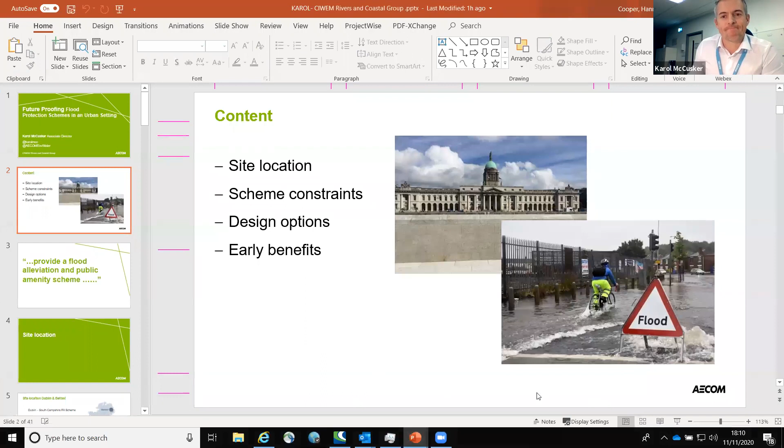Hey folks, first of all, thanks for inviting me to give this talk this evening. I hope you find it all interesting. I'm slightly envious of you all because I appreciate at least 90 odd participants are sitting at home probably having beer or wine whilst watching this, while the rest of us are stuck in the offices. But I'll not hold that against you.

So I'm going to talk just quickly about future-proofing flood protections in an urban setting, and this is becoming more and more topical as we move on and as our designs have to take account of the urban setting more so than the rural settings.

I'm going to talk roughly about the site locations, and for this I'm going to use two example sites, East Belfast and South Campshire. I want to talk a bit about the constraints that we came across in the scheme, and you'll all come across these sooner or later when you design these. The design options that I've learned and developed over the years in my career, and the early benefits you can expect going forward.

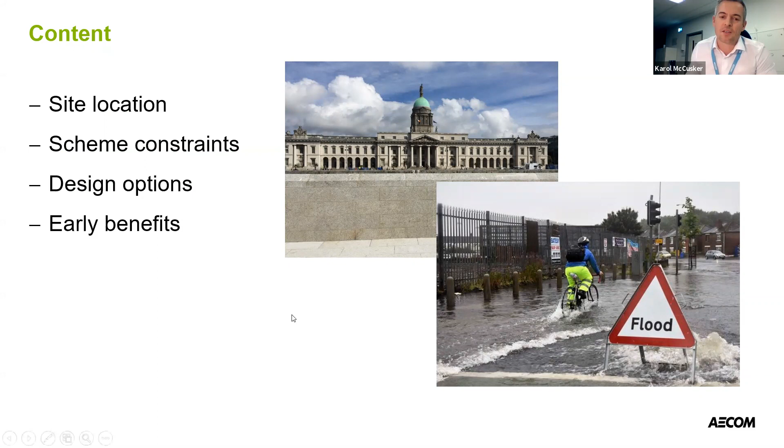The first important thing is that whenever you sit down to design a flood alleviation scheme, it's important to remember flood alleviation schemes are multi-tools. They can be used more so for public amenity as opposed to just for flood alleviation. There was a time in the past when we were concentrating purely on flood alleviation, but as we look to the future, I think as engineers we've all accepted that we have to develop a flood alleviation scheme that does more than just protect against flooding.

So I'll cover the site locations. As alluded to, the two sites we're going to talk about: one is in Dublin in South Campshire, actually on one of the main roads in Dublin on the quayside. And the other one's in East Belfast. We are going through heavily urbanised areas.

So the need for the scheme: in Dublin, the South Campshire is a stretch of land approximately a kilometre in length that goes along the south bank of the River Liffey. Dublin falls north to south, so this is not a major issue for the northern bank, but for the south bank of the River Liffey, once water gets up to a certain point, it flows inwards into the inner city. The rough floodplain for the flood event we were designing for was roughly 32 hectares of inner city Dublin being flooded. Bearing in mind that Dublin is quite an old city with basement houses, major roads and everything, this was a major event that could occur.

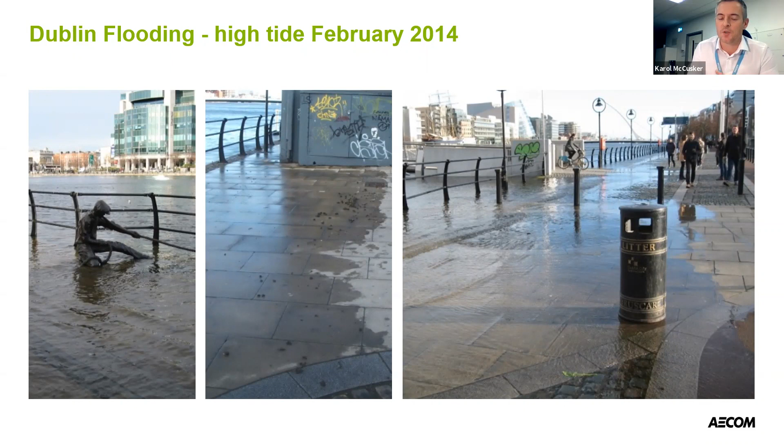So both schemes were definitely needed to help from a social, economic and environmental aspect, because once you have flood water that enters an urban environment and then has to return, the pollutants and problems that coincide with that have to be prevented. So now it would be relatively straightforward if it wasn't for the site constraints, and you'll recognize a lot of these constraints as you go through some of your own designs and careers.

The first one was in Dublin. As I said, it was about a kilometre length along the River Liffey. The River Liffey hosts the Dublin Tall Ships biannually sometimes, which has an economic benefit of around 30 to 50 million euro coming into the city, and that in itself is a massive economical benefit. So whatever you do along this 1 kilometre, you had to take account that these ships would have to pull alongside and still use this area.

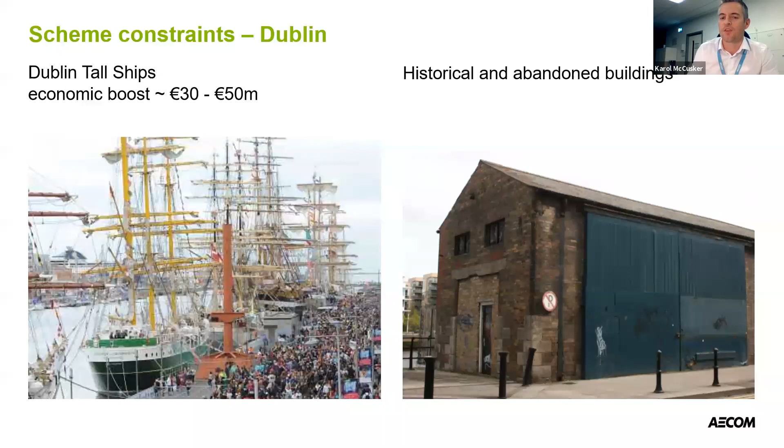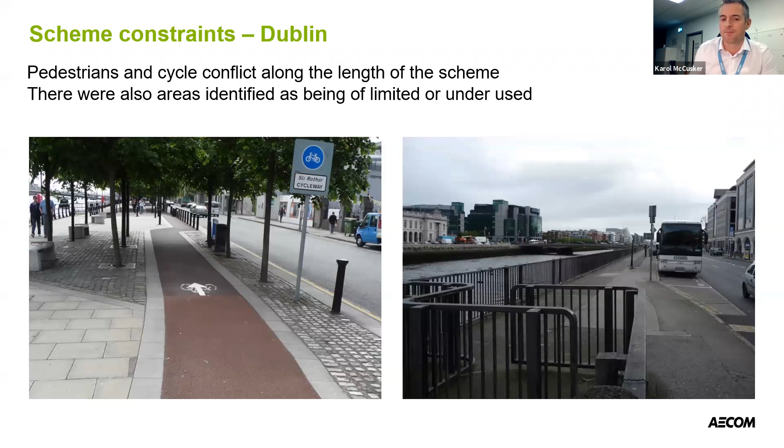On the right-hand side, you can see how some of the area was underutilized. We had a large parking bay for buses that was occasionally used, and we had a horrible grey area that was used for nothing more than people on occasion walking past, but not used as an open space, for example. So we had to consider all these things.

In East Belfast, then, we had the typical thing that you probably see as river engineers doing inspections: that horrible grey water, which is really a symptom of being either a channelized river or a river that doesn't get enough air in the water. It's not very good for either the environment or even for people to look at.

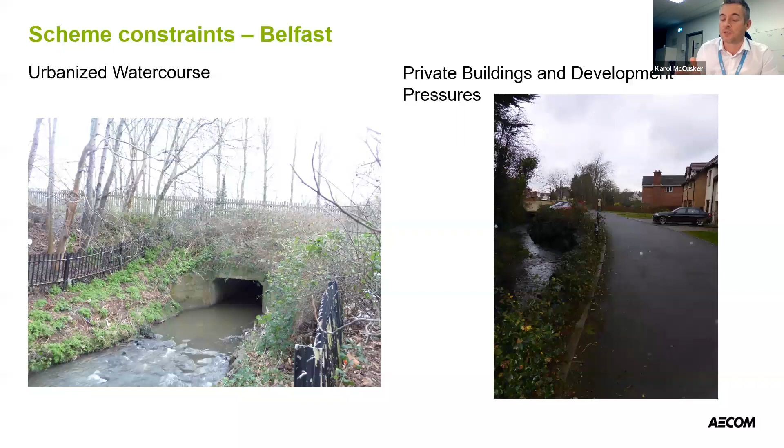So those are the problems. What I'm going to show now is some of the tips that we've come across in innovative design to try and compensate and address those issues.

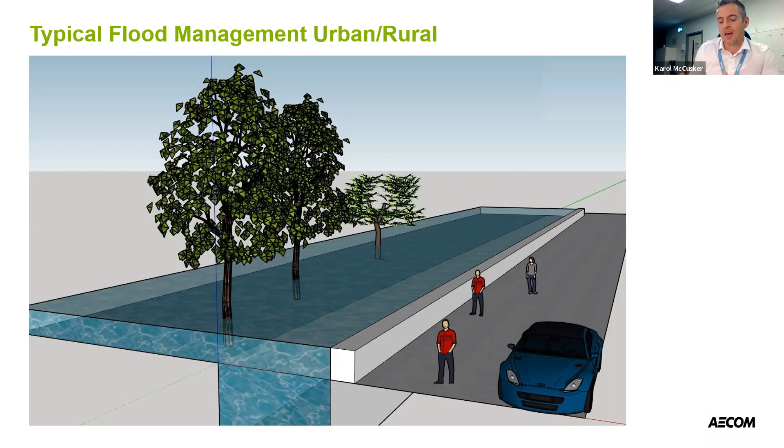I suppose we probably all know that traditionally flood management of urban and rural areas just took two general options. The first one was on the urban side, you built your flood wall as close as you could to the top of the bank. And in the rural atmosphere, you flooded as much of the green open space as you possibly could to park the flood water.

Moving forward, you generally then get into the solid urban solution where the options are basically you build a wall either side of the top of the bank. Then you have to worry about freeboard and probably some climate change, so you just build the wall higher. Now that has two effects: one, it changes the velocities of the river itself, the river becomes very channelized, and then the ecosystems within that river suffer dramatically for this.

Plus the people then get cut off from the river. And generally once people get cut off from a river, they generally forget about it, or in worst case scenarios, it becomes a very convenient way of dumping materials or just getting stuff thrown over the wall and forgetting about it.

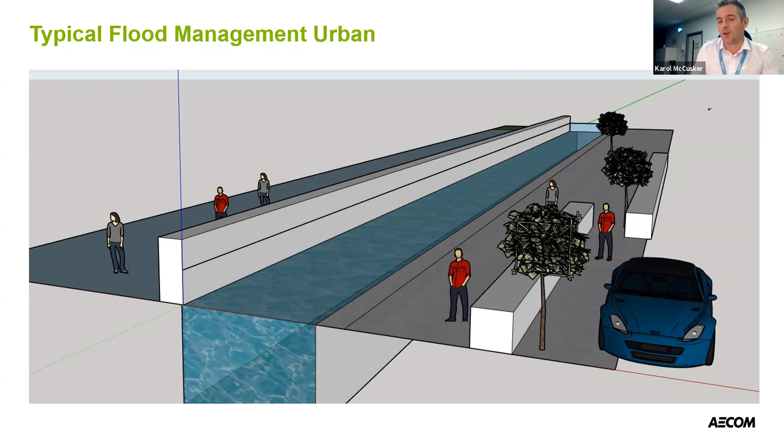So for this option moving forward for the South Campshire, what we looked at doing was pulling the flood wall back as far as we possibly could towards the buildings. Bearing in mind we're dealing with a different type of flood mechanism here - a coastal flood that would come in over a certain amount of time, so we'd have notice of it and could afford to deploy floodgates. So we played around stepping the flood wall back into the city as far as we could, knowing we had concrete areas there that could act in the same way as a rural floodplain storage.

Then we looked at some of the open space areas. This first option I showed was a large concrete area with a handrail. Looking behind in this photograph, the typical Liffey walls are built just on top of the keystones with a bishop-shaped hat stone on top. We wanted to replicate that but make this area more open. To the right-hand side you have office blocks with no green space, no open space, and people weren't congregating - they just went to their office, had lunch at their desk, and left. This point actually faced Custom House, one of the most iconic buildings in Dublin, and generally tourists just got off the bus, stood on the concrete, took a photograph, got back on the bus and moved away. There was no real atmosphere.

So we designed a flood wall set in a Z shape. The reason is purely that it can rest on top of the historical stone without having to bond to the stone itself, protecting the historical atmosphere. We tried to replicate the same type of wall to the outward eye - it has a reinforced core, but to anyone looking at it, it mirrors the existing historical stones on the far side. We put in some benches and opened up the entire area.

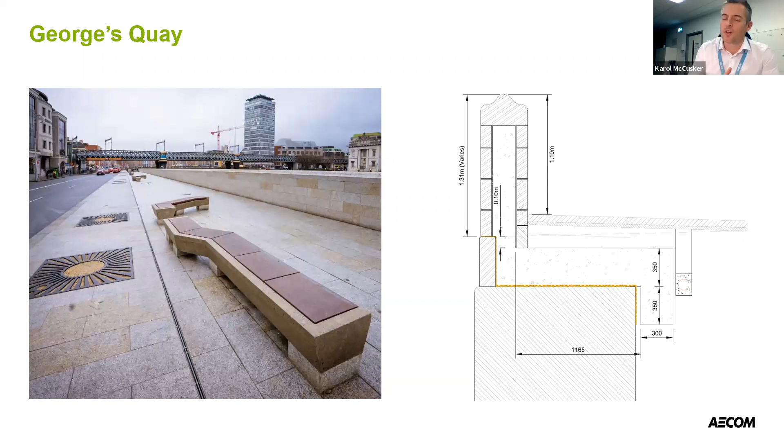We did a quick traffic survey of the parking bay and found it's not overly used - it's almost redundant. So we took it out completely and opened up the space for more public use. With the extra space, we installed a Dublin bike system, one of the most successful bike systems in Europe and heavily used. This became a commuter hub for people who wanted to use bikes or wanted to come across, sit on the bench, and have more of a lunch break outside beside the River Liffey.

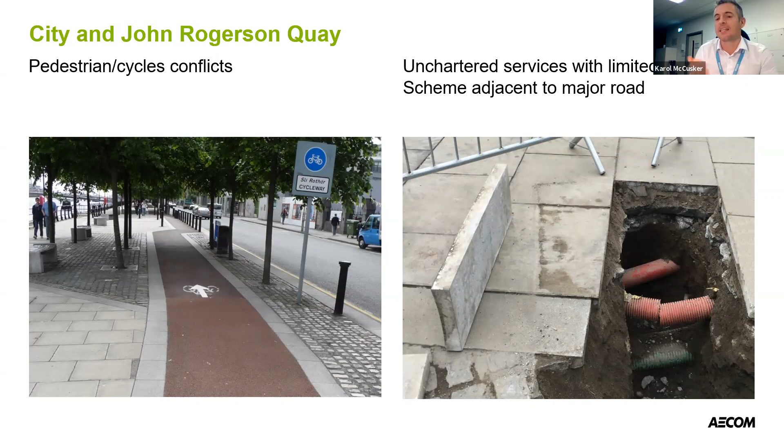Moving further down the scheme, we still had to address the public pedestrian interface - how general commuters would make their way across with bicyclists whizzing past. And then we had the inevitable in urban settings: uncharted services. The one piece of advice I always give people is that any correlation between service records and what actually happens on site is purely coincidental or luck - don't rely on it at all. Services will always be exactly where you don't want them to be, at a very shallow depth. We had to take all this into account in our design.

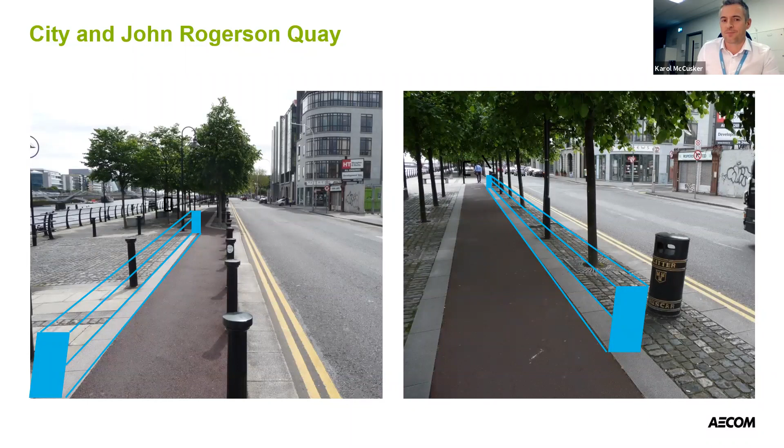As you get towards the quay, this here's looking upstream now along the Liffey. These are the keystones that the boats would use for the gangways to come onto, and they would use them to travel up and down.

So we wanted to put a flood wall somewhere along here that wouldn't impede that, but also would allow people to come over to have a look at the river. We wanted to keep it along the existing handrail as possible. There is a very definite line in the landscape there that we could put our flood wall on without impacting either the keystones or the existing landscape environment behind it.

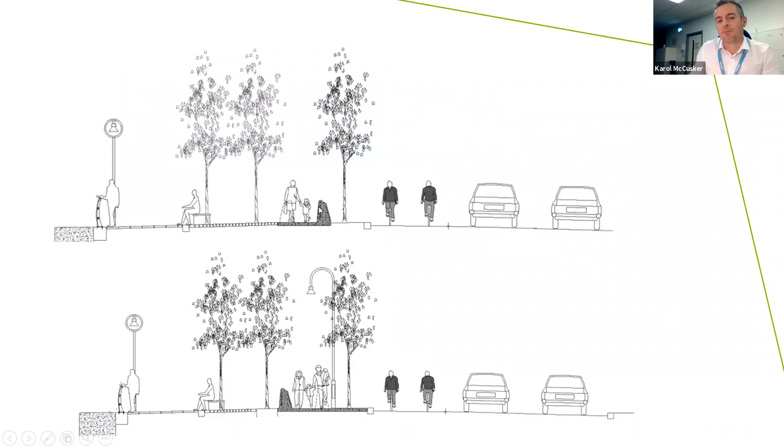Here's a quick cross section of what we're looking at. The top one, going from left to right, you've got your handrail, you've got this massive open area, and then we decided to put the flood wall towards the road. On the road, we looked at rationalizing it to see could we actually fit a two-way cycle path on the road itself to improve the amenity value.

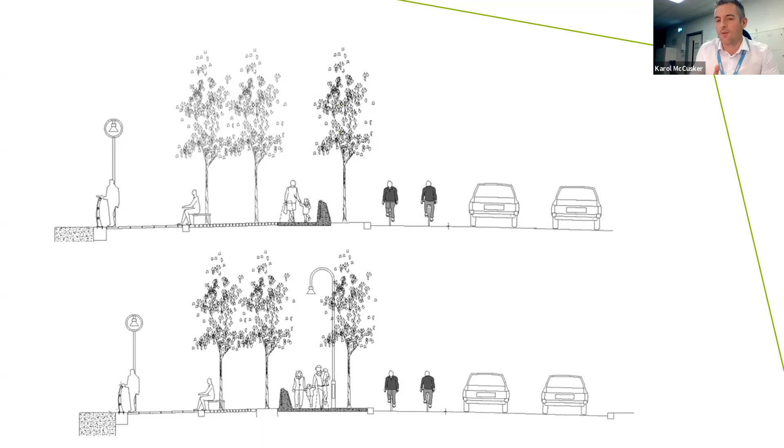In the bottom one, you can see where we've moved the wall inwards again. So people will walk continuously up and down this entire stretch of 1 kilometre without knowing really they're walking through or over a flood defence.

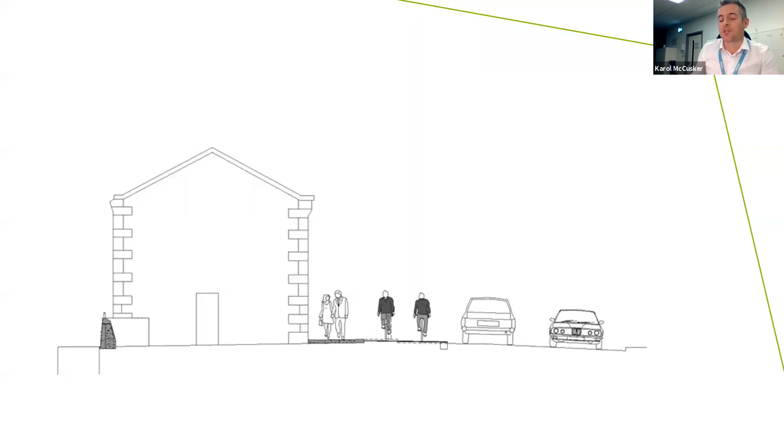Whenever we got to the abandoned buildings, we identified the big problem there was that there was no usable space. These buildings opened out onto a main road. So what we did was we pulled the flood wall as close to the river as possible, giving these properties a door out onto a usable area, in the hope that this could regenerate possibly businesses and the likes of that in the economy.

So the design itself, to overcome the shallow dig we were permitted, what we devised was a strip foundation of reinforced concrete that would go down along the way. Because we were up against a main road and a river, we wanted to have something that could be deployed relatively quickly without having a massive footprint. So that's why we embarked on using precast concrete units that would be 2 meters in length.

The 2 meter units then would sit on top of the concrete strip foundation, and a stainless steel bolt and washer would be used to hold them in position. Then to hide that, they would be cladded with granite on the riverside, and on the city side would have a concrete pattern cast in.

Given that all flood defences are always subject to change and moving forward, we designed it to be as adaptable as possible. So the 2 meter sections with the 2 bolts can become an opening in the future, should we ever need it, by actually just cutting the bolts and removing the unit.

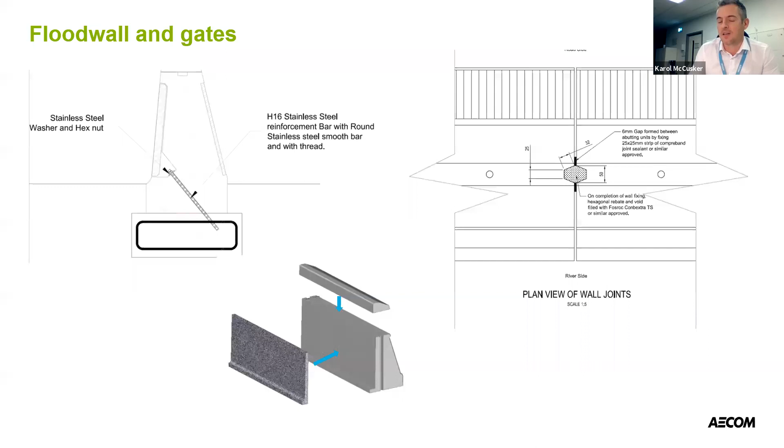On the top of the unit, you'll see in the top left-hand corner, a slight notch. The reason for the notch is that in the future, should we ever need to, we basically remove the coping from the top of the wall and another precast unit slips in at the top of it to provide additional freeboard, almost like a Lego set, so that should future generations ever deem it necessary to raise the flood wall even further, they have that option.

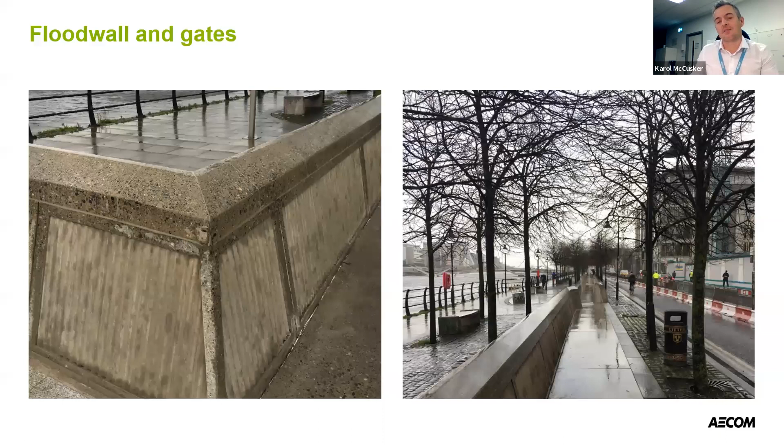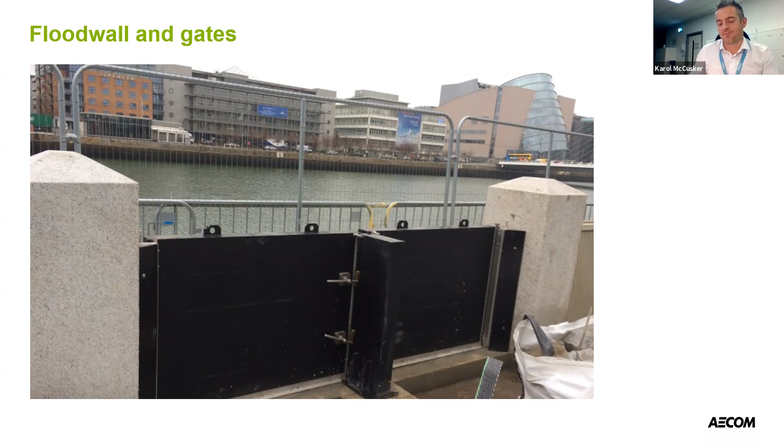Now, I do appreciate what everyone's probably saying, holes in a flood defence wall are never good. So what we did was that where the gates didn't require to be opened all the time, only at festivals, we put these industrial or heavy duty black floodgates in that would generally remain in the closed position. But on the footpaths, what we did was we installed a fold away floodgate. Now these floodgates basically fold into a small shallow compartment held between the 2 flood walls.

Once we get notice of a flood warning coming, we start to close these floodgates in a particular sequence. And the sequence is quite simple: you open the cover, beneath the cover is the floodgate itself, you fold it out and then it folds back on itself. The one thing you do have to be careful of, whenever you design any sort of floodgates, is to be careful about deployment.

Bearing in mind that if you have a major city that has a flood event to address in the future, and as these flood events become more prevalent and unpredictable, we have to build in resilience. So I didn't want floodgates that have to be brought from the other end of the town, through city traffic, or through possibly blocked roads. That's why I opted for these ones that are already on site and only require to be folded out, and can be deployed easily by any member of the civil support, fire brigade, or operations unit. It doesn't require much training. It's relatively easy and they can be deployed quickly.

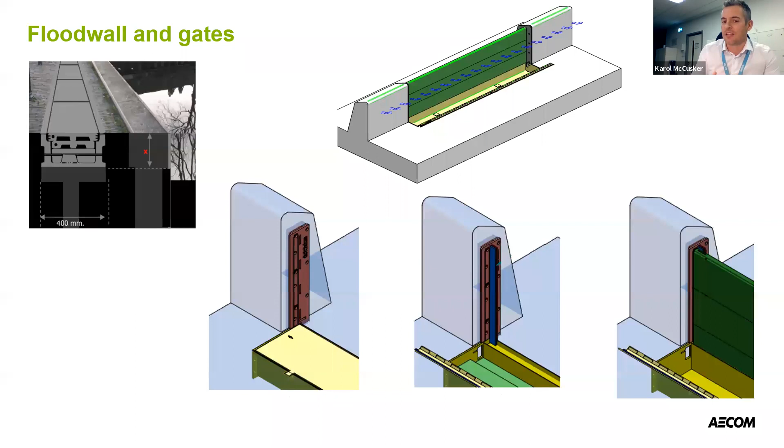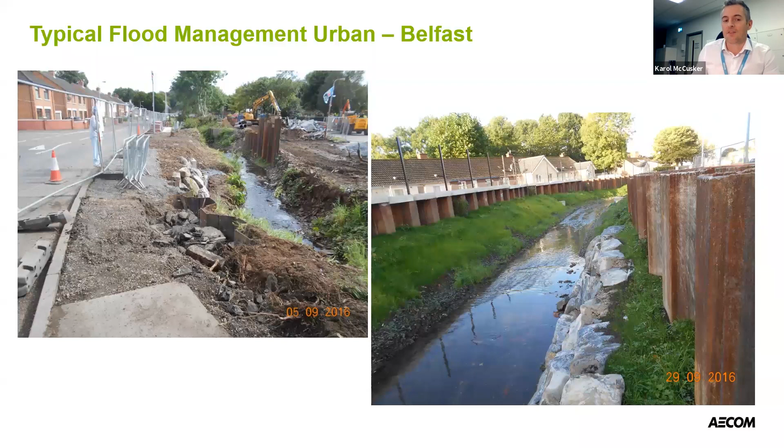On the left-hand side, you can appreciate we're stuck with a similar problem here. We had development. One trick I'd suggest you all consider is using rock armour wherever possible. Rock armour allows you to do two things. One, look very carefully at your river to see if it could favour the left-hand bank over the right-hand bank. What I mean is you could steepen up the left-hand bank to give a wider, greener area on the right-hand bank. All you need to do is look upstream and downstream to see if you can get some sort of green or grass corridor running alongside your river, allowing wildlife to travel up and downstream. So you use the rock armour to steepen one bank, allowing the river to move closer to that bank.

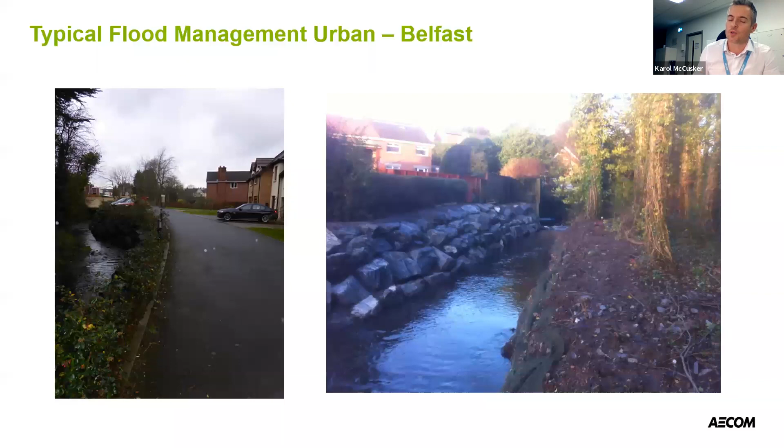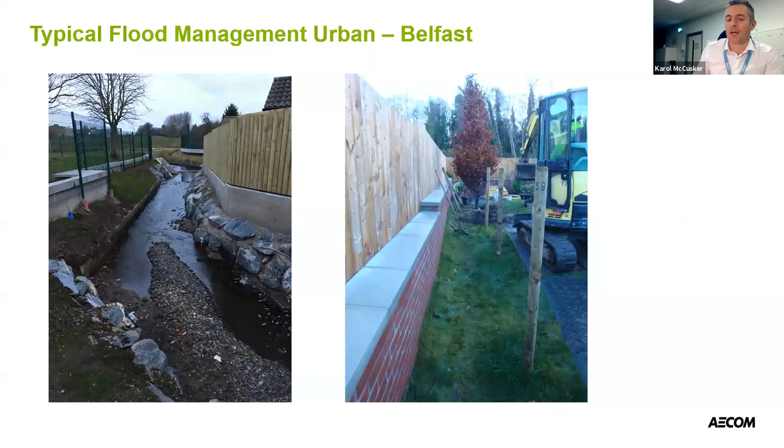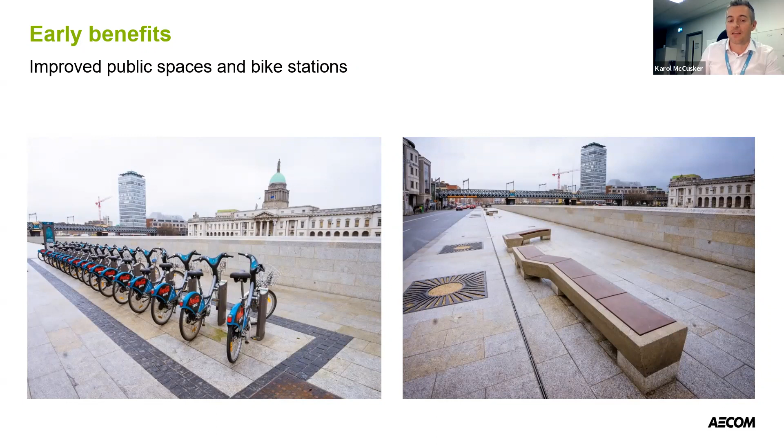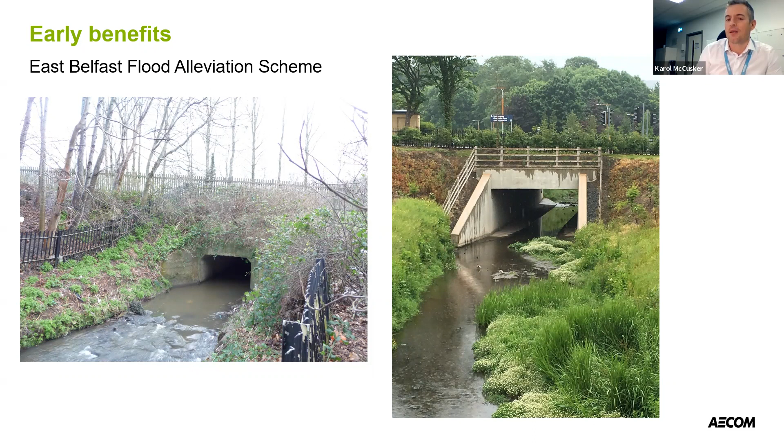The area was already in a floodplain, so we weren't really touching it or changing it in any manner. All we were doing is letting the people and the public get a better appreciation of the river.

So the big things I would take forward in your career with all your design: the first one is flood levels. The flood levels you design for today, you check today, but you'd always check tomorrow. By tomorrow, I'm talking about climate change and what the climate could be and the flows could be.

But also always check for the big one, as I call it, the exceedance, the one above what you've designed for. Once you alter a floodplain in any manner, you have to check what happens when your defence is overtopped, because the flood will behave in a totally different manner, and it's better to be educated and pre-warned for where that will happen.

Rivers are living things. We always have to remember that. The closer you get to it, the less you should try to control it. A river generally will look after itself and will adapt to its own regime without interfering with it too much.

So I always say you can do a lot of intervention if you're away from the top of the bank, but as you move closer and closer to the top of the bank, the less work you want to do, because the river can take care of itself there if it's given enough room.

Your design should always be adaptable, flexible, and kept as simple as possible. Innovation is always driven by change or constraints, but the most innovative things are always the simplest inventions, the simplest way forward. So try to adopt a simple, adaptable, and flexible approach to account for all the unknowns you'll inevitably see.

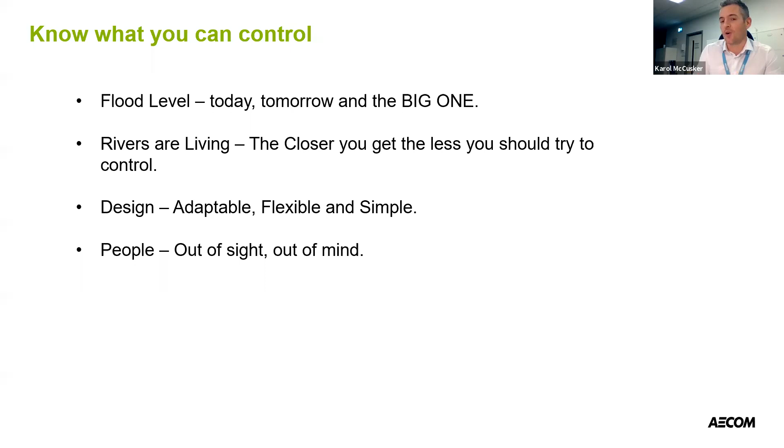I hope you found that interesting, and I'm sorry if it was a bit of a whistle-stop tour, but I'm happy to take any questions or comments you may have.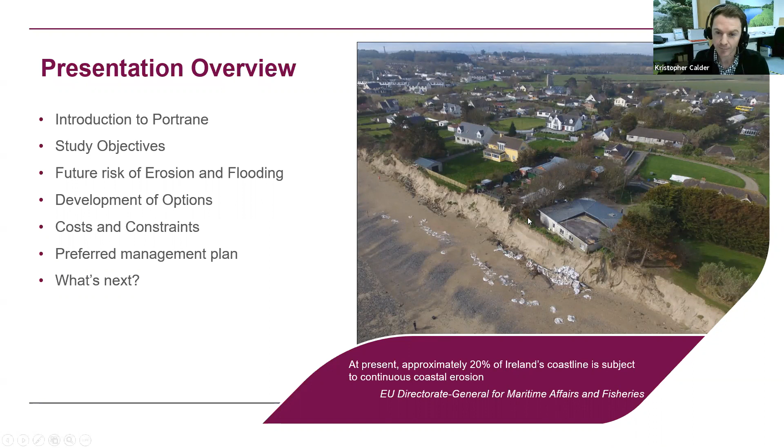So just a little bit about Portrane. Portrane is 18 kilometres north of Dublin, and it has a small coastal settlement with a population of just under 2,000 people. Portrane, as you can see here, is a naturally sandy spit that separates the Rogerstown estuary on the left from the Irish Sea on the right.

It has wide, extensive flat beaches, and it's very popular with locals for various recreational activities. As you can see from this picture, the site is also of high environmental importance owing to the variety of unique habitat and wildlife found at Portrane. It has just about every designation you can think of, including a special protection area, special area of conservation. It's been designated a Ramsar site, and it's also been proposed as a national heritage area.

So whilst this is great for protecting the environment, it makes our job as coastal managers pretty challenging whenever we're trying to develop coastal management strategies.

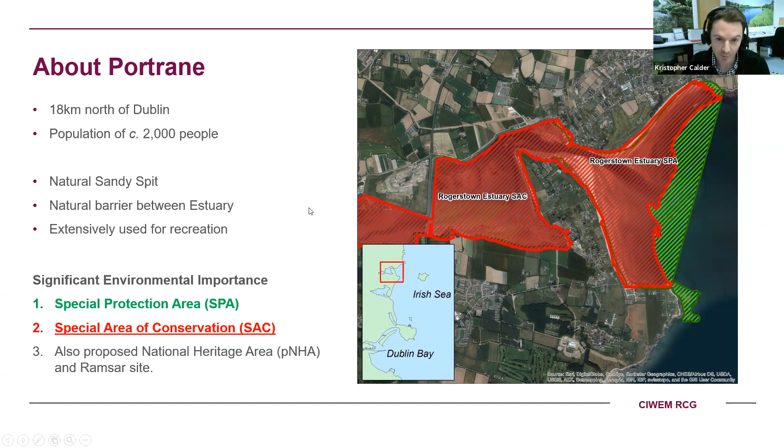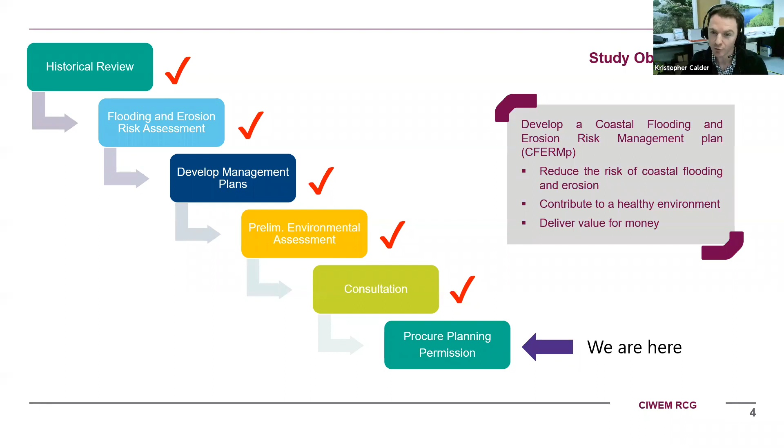In terms of the study objectives, we were commissioned by the Office of Public Works in Ireland to undertake a coastal flooding and erosion risk management study in 2018. This is very similar to the FCERM studies in England. And like all of these studies in Ireland, it had a very well-defined workflow as outlined by this graphic. So the main objectives of this study was to reduce the risk of coastal flooding and erosion, and make sure that any scheme that we developed contributed to a healthy natural environment, and of course to make sure any scheme delivered value for money.

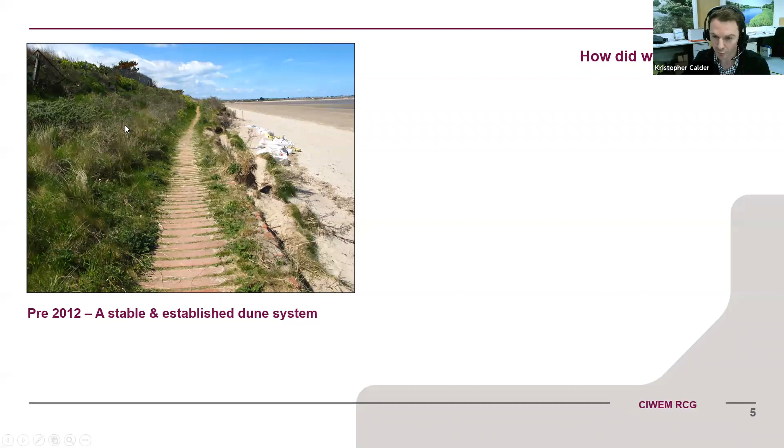So skipping back to Portrane, this was a picture taken back in 2012. And you can see on the right here that we have a very wide and flat sandy beach, which was very popular with the locals. We also had this nice boardwalk and around 30 meters of this well-established coastal dune. And behind this dune system, we have a row of around 11 residential properties.

Now, just 1 year later, Portrane was making local headlines after a single storm event ravaged almost 25 feet of the coastline. At the time, coastal retreat of this magnitude was unprecedented and was attributed to a particularly stormy winter.

However, if we skip forward another 6 years, the coastline had retreated an additional 20 meters and it completely undermined one residential property. The local council authority then had to demolish this property under their Dangerous Structures Act and relocate the family. So it was really quite dramatic.

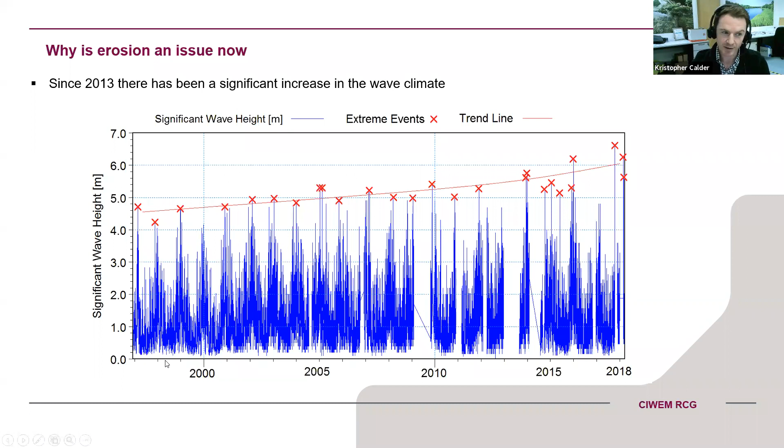So that gives you a bit of a historical perspective on the site. The next thing we had to do was assess the threat of future erosion.

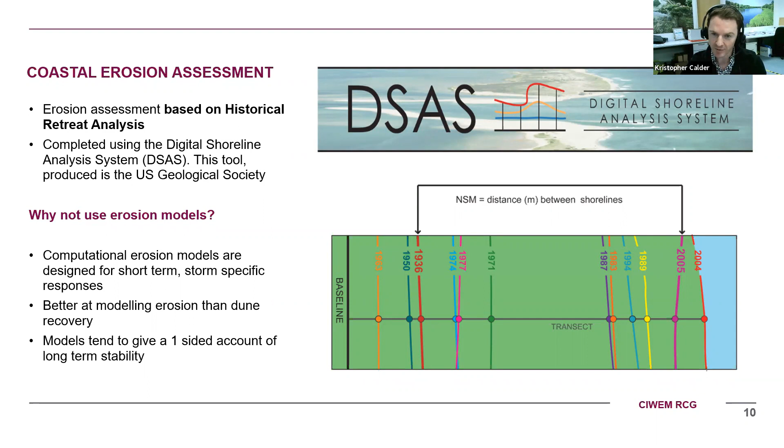To do this, we used the historical retreat analysis toolbox created by the US Geological Society. We didn't use morphological models for this exercise because there are no models that adequately simulate both erosion and dune recovery over the long term. Most models like XBeach, SBeach, or even DHI's Shoreline module tend to give a very one-sided account of coastal processes, as they're generally set up to look at coastal erosion and not dune recovery.

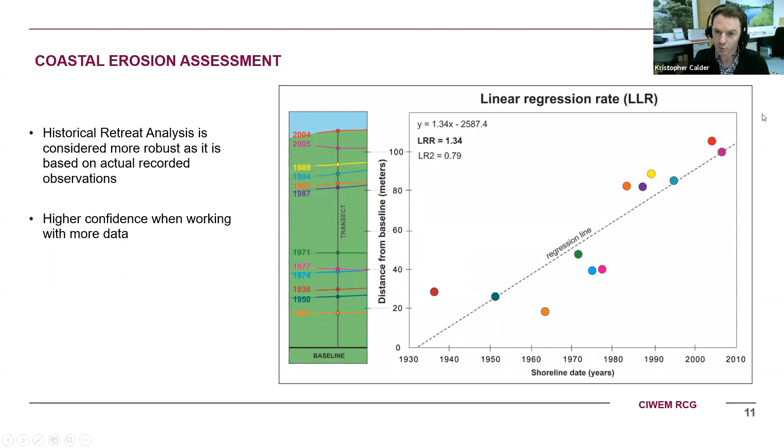The historical retreat analysis involves identifying the position of the coastline based on historical survey data and quantifying the magnitude of coastal change between different years. The existing rate of erosion can then be determined by a best fit estimate, and this estimated line can then be projected forward into future years to estimate future coastal change.

Using this approach, we found that the coastline at Portrane could retreat by up to 70 meters by 2100 if sea levels increased by half a meter under what the OPW call the medium range future climate scenario. If this was to happen, around 36 properties could be lost to coastal erosion alone.

Looking at the high end future scenario, whereby sea levels could rise by 1 full meter by 2100, we find that the coastline along Portrane could retreat by almost 90 meters, which would put around 46 properties at risk of coastal erosion.

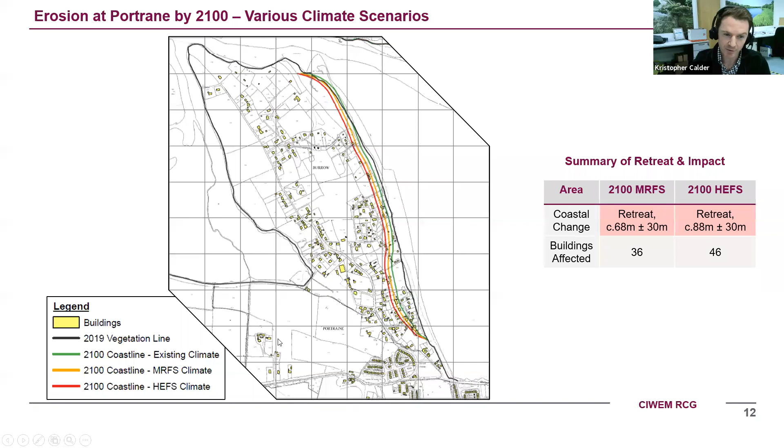Moving on to the flood assessment, RPS undertook a coastal flooding assessment using DHI's MIKE21 FM models. These flood risk assessments accounted for breaches to the dune system and also wave overtopping at relevant locations along the coastline. The overtopping rates were calculated using Eurotop's overtopping tools and were applied to the model as source terms.

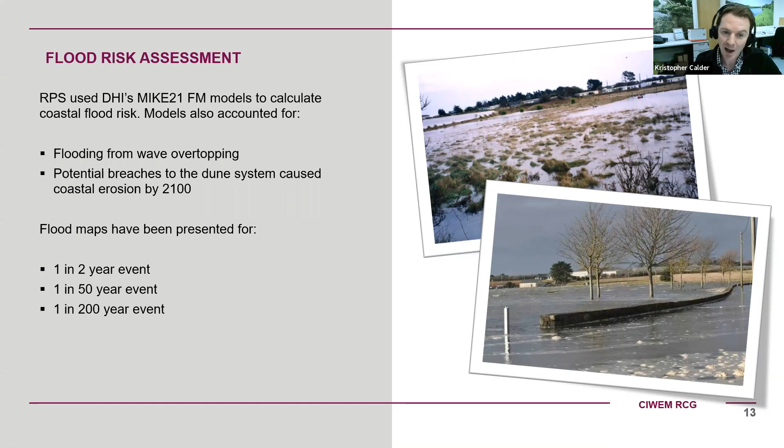In terms of the number of properties that would be affected, we find that under a 1 in 200 year event, around 23 properties would be affected by coastal flooding. Once we increased sea levels to account for future climate change, this number actually increased to 267 properties, which is an increase of more than a factor of 10.

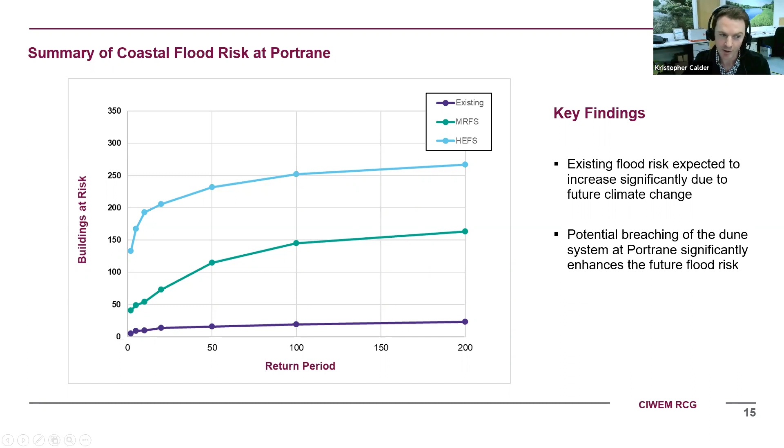We also find that the erosion of the existing dune system, which currently affords a good deal of natural flood protection, significantly increased the risk of flooding to Portrane under future climate change scenarios.

Having quantified the flood and erosion risk of Portrane, we then continued to follow OPW guidelines and moved on to developing options.

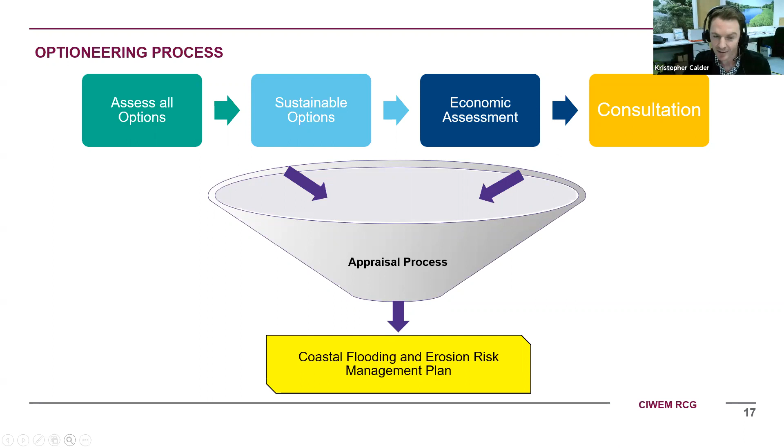Coastal management options were considered and developed through an established optioneering process. In brief, this process involved identifying all options regardless of potential obstacles, and then removing options that were not considered technically feasible, sustainable, or economically feasible.

This table describes just some of the options that were considered for Portrane. Looking at the hard engineered solutions, we have the traditional defences such as rock armour revetments and breakwaters.

The obvious advantage with hard defences is that they're usually very effective in mitigating coastal erosion and flood risk. However, on the flip side, they can also impact the natural coastal environment by increasing erosion in adjacent areas and contributing to beach drawdown.

On the other hand, we have soft engineering measures that generally work with the environment to enhance the natural protection afforded by the dune system. These tend to be relatively inexpensive options, but they also require quite a lot of maintenance and wouldn't provide the same level of protection as a hard defense would.

We also have other options such as no active intervention, or your do nothing option. We also have managed retreat, which effectively involves creating a sacrificial buffer zone whereby no further development is permitted. The difficulty associated with this option is how do we compensate for people who find themselves in no-build zones or sacrificial buffer zones.

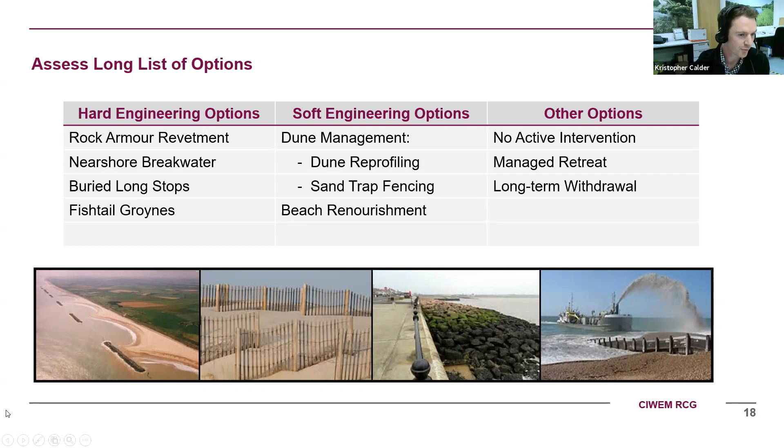So having considered these options at a high level, we had to develop a management plan for Portrane. Using Brundtland's Pillars of Sustainability model, we determined that a management plan could only be considered sustainable if it balanced the environmental, economic and social impacts.

In respect to the environment, we wanted to develop an option that would work with the natural environment and complied with the Habitats Directive and other relevant legislation. In terms of economics, any scheme should obviously be cost effective and deliver value for money for the local authority. Then we also have social factors.

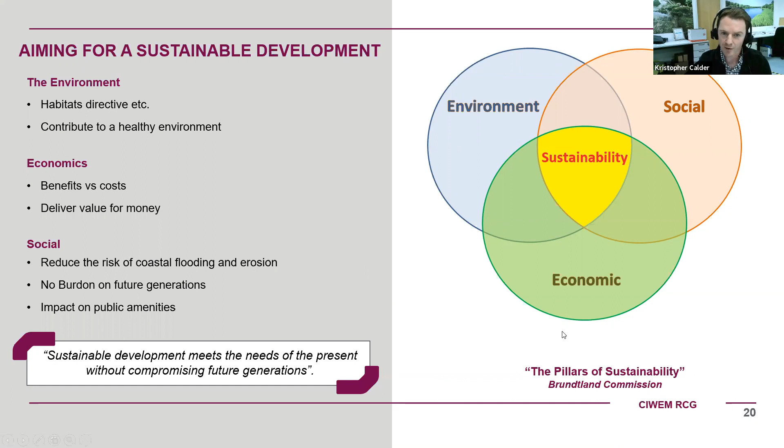We wanted to develop a scheme that mitigated the risk of coastal flooding and erosion without placing a burden on future generations in terms of very big, substantial maintenance costs going forward. We also didn't want to develop an option that took away from the existing natural environment, such as loss of the beach levels, or put something in if you couldn't use the beach as it is.

So the first scheme that we developed for Portrane involved constructing over 1 kilometre of rock armour along the shoreline to mitigate erosion. We also had a series of strategically placed embankments to prevent coastal flooding on the rear side of the burrow. We estimated that this option would cost around 11 million euros to construct.

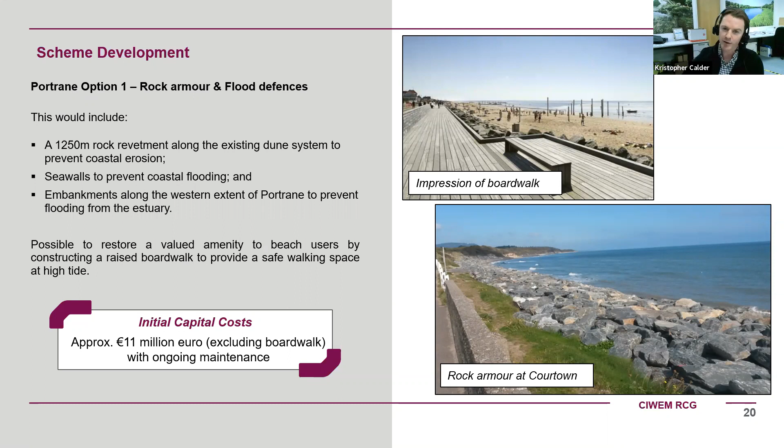And depending on detailed design and available budget, we could potentially restore a valued amenity to the beach by creating a boardwalk. The second option that we developed for Portrane was managed retreat.

This was obviously more difficult to define, as at present there is no national strategy or framework in Ireland to implement managed retreat. This is something that needs to be developed by the Irish government and is beyond the control of the local authority. But despite this, RPS based this option on models implemented in other countries throughout Europe, which would involve purchasing and demolishing private property to facilitate future coastal change.

At Portrane, this could involve purchasing around 13 properties over the short term at a cost of around €3.5 million. Over the longer term, up to another 34 properties would need to be purchased and demolished to facilitate future coastal change.

Obviously, there are several disadvantages with this option. Firstly, it would do nothing to mitigate the significant coastal flood and erosion risk at Portrane. The second point is that the lack of a national policy means that we can't be certain how local homeowners would be affected by a policy of managed retreat.

And lastly, because Portrane is on a sandy spit, there's only so many times we can keep on going back before we end up in the estuary. So in this instance, there is no natural point to retreat to.

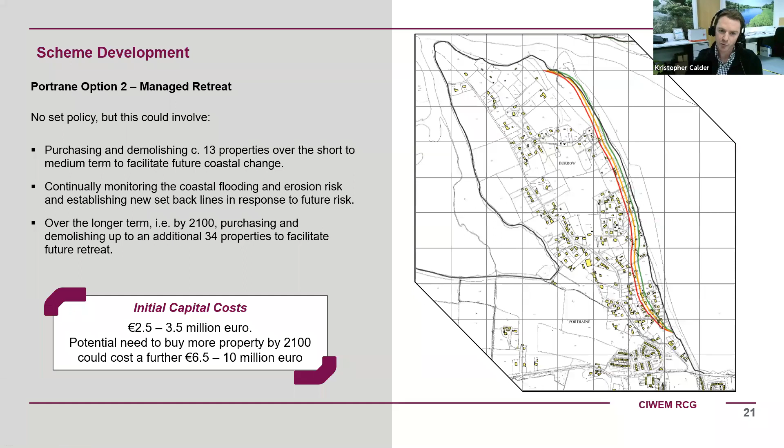The third option that we considered would involve renourishing the beach at Portrane to restore beach levels and constructing special groyne structures to control the movement of sand along the beach. Without these structures, any sand placed on the beach would be quickly removed by any storm events.

An example of a similar scheme at Clacton-on-Sea is shown in this picture here on your right. Overall, this option would effectively mitigate the risk of erosion and flooding, but it would be significantly more expensive than the other options, at a cost of around €16 million with ongoing beach renourishment maintenance.

The major constraint associated with this option would be in obtaining planning permission. This could be very difficult as Portrane is surrounded by environmentally designated areas which are protected by European law.

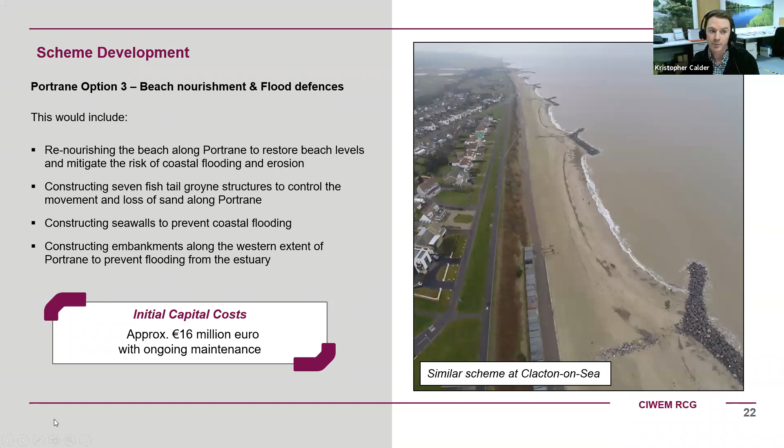This slide just gives you an artist's impression of what the scheme would look like if it was constructed. And you can see how this scheme would effectively mitigate coastal erosion by restoring the upper beach profile, which would in turn prevent large waves from actually approaching and eroding the coastline.

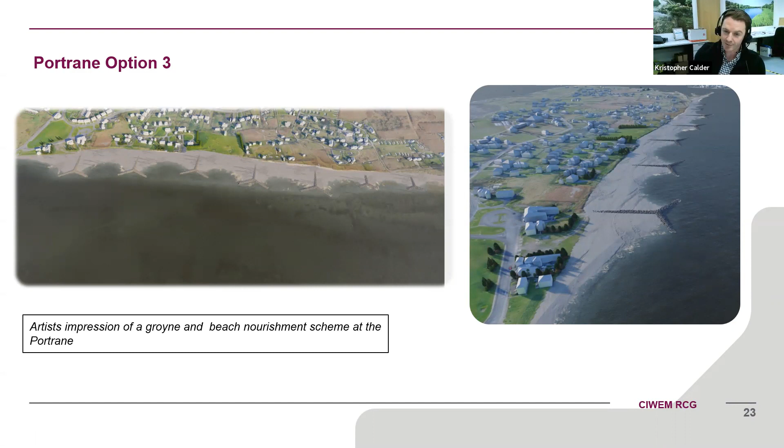Another benefit is that unlike the rock armour revetment option, this scheme would maintain the natural interaction between the beach and the dune system and would therefore be complementary to the conservation objectives of the nearby environmentally designated areas.

So in terms of costs, the next phase of the optioneering process was to determine if any of these options represented value for money through a benefit cost assessment. In brief, a scheme is considered economically viable if it produces a benefit cost ratio of more than 1.

So in terms of our preferred management plan for Portrane, the preferred plan was option 3. The rock armour revetment was rejected, even though it was more cost effective, because of the impact the rock revetment would have on coastal processes.

With a revetment in place, beach levels would gradually drop over the next 10 to 20 years to the point whereby beach users couldn't walk along the beach at all phases of the tide.

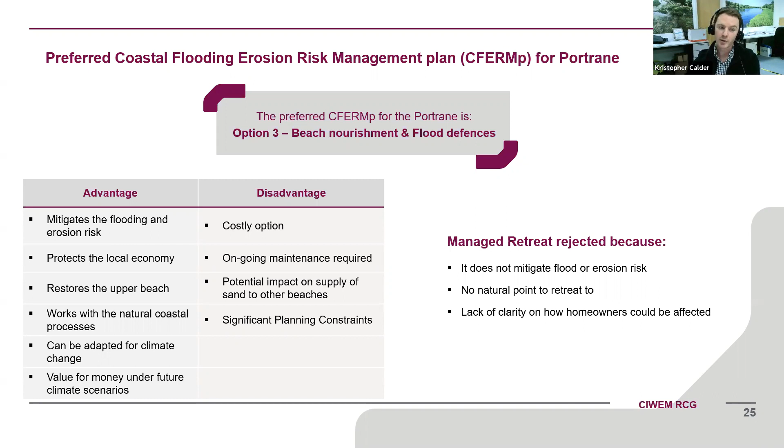So what's next? Having identified the preferred solution, we're looking at the next stages of the study. Before securing planning permission, we will have to undertake a full environmental impact assessment in accordance with the Habitats Directive. As the scheme is likely to have a significant environmental impact, the local authority are hoping to be granted planning permission under Article 6.4 of the Habitats Directive by demonstrating that there are imperative reasons of overriding public interest that support the scheme.

This is likely to be a significant challenge, as there has only ever been one project granted planning through the Habitats Directive IROPI process in Ireland, and that was for the upgrade of an existing wastewater treatment plant in County Sligo, which served over 13,000 residents. So it's going to be a challenging couple of months ahead, but we will pursue nevertheless.

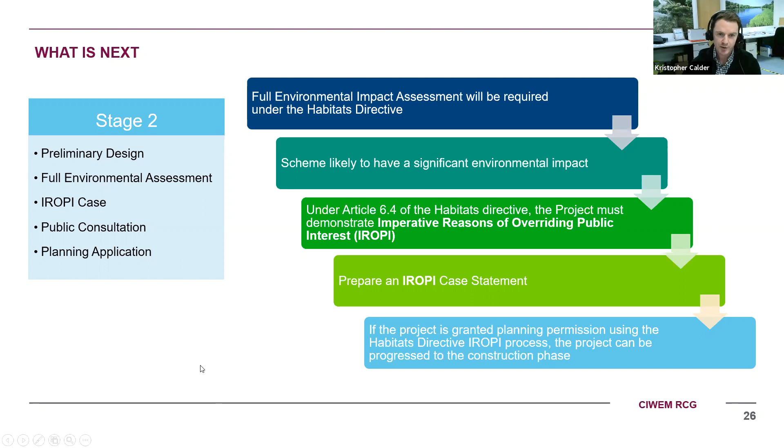But in the meantime, given that the IROPI planning process could take some time, the council were keen to develop some interim solutions to mitigate the risk of erosion over the short term.

To this end, RPS developed a wave attenuation array made from precast concrete units. The purpose of these units was to effectively trip the waves before they impacted the coastline and therefore slow down erosion. Since their installation in 2018, rates of coastal erosion have actually been reduced by around 50% compared to unprotected regions of the beach.

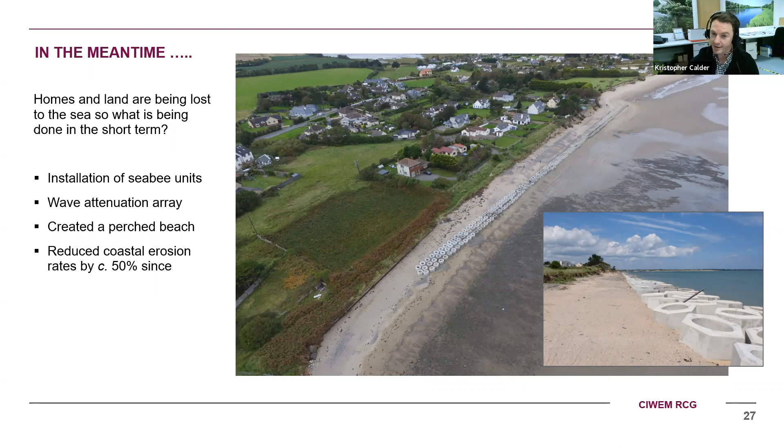Another benefit of the units is that they've created this perched beach area behind the units, and this is very popular with locals who can now use the beach at high tide. Another benefit of this perched beach is that, again, it prevents waves from attacking this area of the coastline.

And that brings me on to the final slide to finish. I'd like to focus on these pictures on the right. So whilst this is an interesting study from a technical perspective, I think it's important to remember that families have lost their home to coastal erosion here at Portrane, and more families could be affected in the near future.

But as hopefully demonstrated in this presentation, developing an effective management plan in an environmentally designated area is far from easy. So there must be a balance going forward, between protecting the environment and protecting local communities that are threatened by erosion and flooding.

It might be Portrane in the headlines this year, but I'm sure there'll be many other similar cases in Ireland and indeed the UK as the effects of climate change and rising sea levels begin to unfold. This will no doubt create some very challenging scenarios for us coastal managers and policy makers over the coming decades.

In terms of what's needed going forward, I think in the case of Ireland, we personally first need a national strategic policy to facilitate managed retreat. Only then can we fully explore all available coastal management options and offer councils and people affected by coastal erosion or flooding a full range of options going forward.

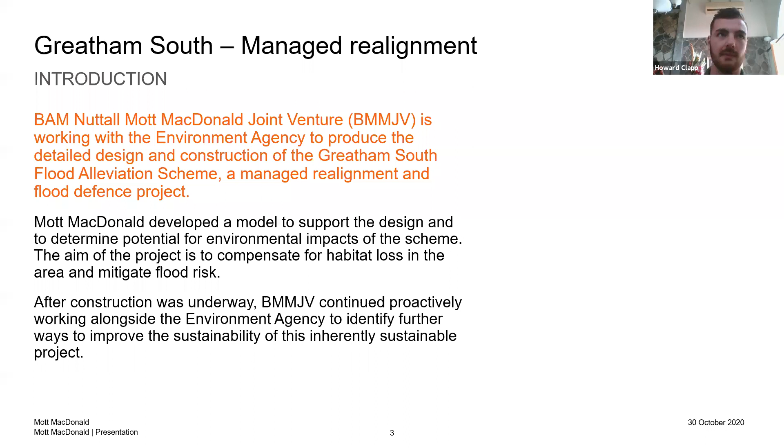The site is located, as I said, in the north of England, near Middlesbrough and along an area called Greatham Creek, a tributary of the River Tees estuary. For anyone not familiar with the area, it's just south of Newcastle. Greatham South was the second part of a series of flood defences in the area, motivated by some flooding that occurred in 2013. At Greatham South specifically, there was a breach in the existing flood defences, which meant a large area of the industry was flooded, and that drove the need to improve the defences in that location.

The site itself is quite environmentally sensitive. It's designated as a Ramsar site, and it's well known for its importance for overwintering birds, bird breeding during spring, and seal populations in the area. There's often a lot of locals and other people visiting the site, particularly because of the seal populations. Because of this environmental importance, it was always a key part of the project and actually made up a KPI on the job.

Next, I'll do a quick run through of the Sustainable Development Goals, just as a recap for anyone a little unfamiliar with them. They were put together in 2015 to form part of the 2030 Agenda for Sustainable Development. The purpose of the goals is to create a blanket approach to achieving sustainability in a variety of projects across different industries and sectors, with the end goal being that by 2030, all the countries signed up to those goals will be incorporating them into all the projects they're involved in.

There are 17 key goals, which are broken further into targets and indicators. For the Greatham South project, there were several categories that the project ticked. The first was quality education. We also achieved some industry innovation and infrastructure, sustainable cities and communities, responsible consumption and production, climate action, life below water, life on land, and perhaps most important of all was the 17th goal, partnerships.

A lot of what was achieved was because of so much involvement with local stakeholders and a lot of work between the different parties in the project team - the Environment Agency, BAM Nuttall, and Mott MacDonald - to achieve the other sustainable development goals we were targeting. As I go through the slides, I've put icons of the different sustainable development goals to show which categories they fit into.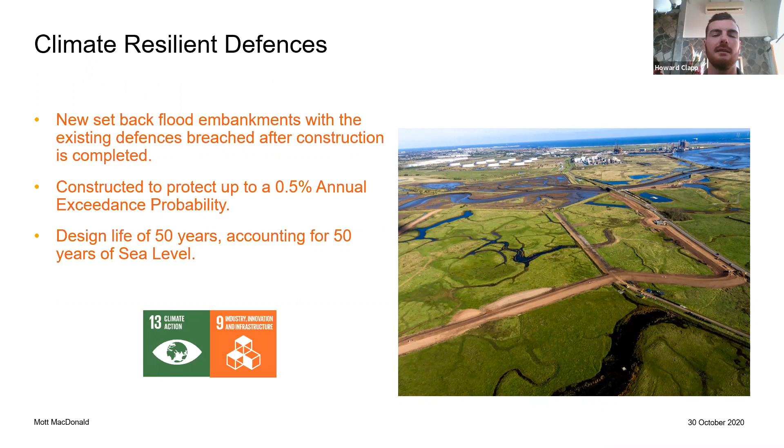The key area of sustainable achievement on the project is habitat creation, and it was always a key part of the project from day one. As I said, it was a managed realignment job, so we always knew we were going to be creating a large area of salt marsh habitat.

However, at the start of the project, during the construction phase, we were able to make some efficiencies in the design and construction, which meant we had additional funds to play with, and these were reinvested back into the project.

Firstly, there was a culvert that needed repair as part of the project anyway. This culvert was thought to be feeding saltwater at high tide into a brackish pond on the landward side of the defences. However, on further investigation, the project team found that this pond was being fed mainly by freshwater ditches behind the defences, and that the culvert wasn't functioning correctly. So we improved the culvert and did some modelling to achieve a new design that actually allowed saltwater to come into the system during high tide, meaning the ponds became more brackish and achieved the habitat they were originally designed to generate.

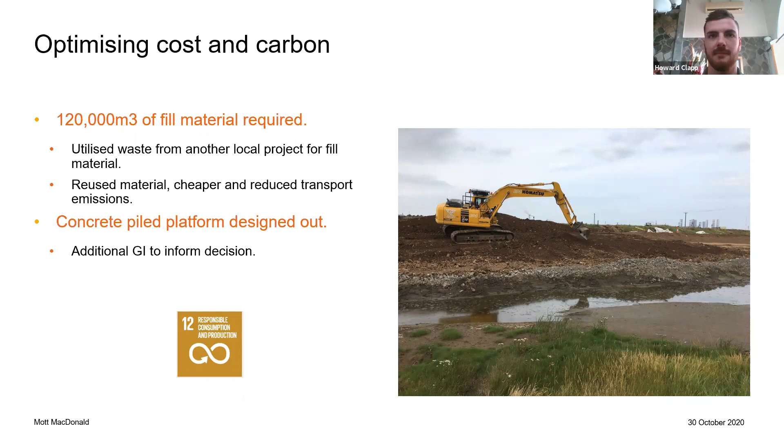The final part I was discussing today is the community engagement that we had on the project. As I said before, there was a lot of cooperation with the RSPB in the area. The RSPB, because the reserve was so near to the site and because it's important for wildlife, often had a lot of visitors that would visit the RSPB reserve and also come to Greatham South. But because of the construction work, the site wasn't accessible.

So in order to maintain this connection with nature that the locals appreciated, we installed a remote camera that was able to be controlled at the RSPB reserve, allowing school trips and other users of the RSPB reserve to observe the site and watch the seals even when access wasn't available.

Towards the end of the works, we also had to design two additional structures: one bird hide and one seal hide at the site, replacing an existing seal hide that had been there before the works started. We involved a local university, which helped them learn about material use and get involved in a real life construction project, and came up with two unique designs for seal hides in the area, which promotes the area and encourages more people to visit and connect with nature.

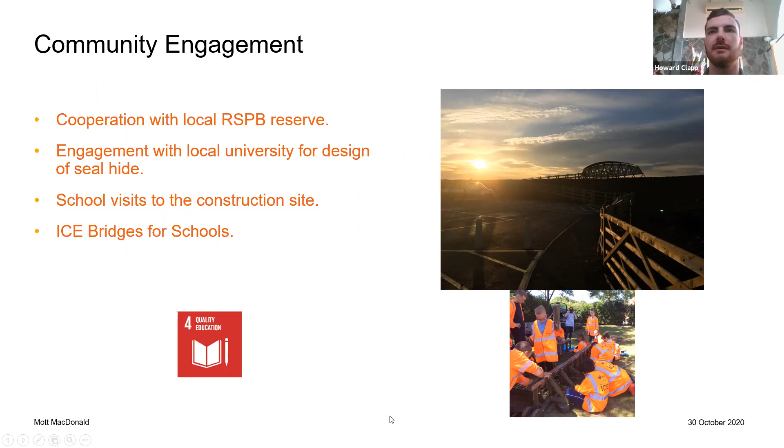So the key lessons of the project: the first is clearly that we had a lot of proactive engagement throughout. Even though we had a large amount of habitat created from the get-go in terms of the salt marsh we were creating by managed realignment, we continued to look at ways to involve local stakeholders and come up with better ideas to improve the overall achievement of the project.

Secondly, any funds that we managed to recuperate from the project, we reinvested in these side projects around the area, to make sure we were maximising the habitat we were creating and the image the project was getting in the local area, and further trying to connect to the people who used the site previously.

And then finally, one thing that's kind of skimmed over is the recognition we achieved through some of the awards we went for at the end of the job. Half the reason I'm here and able to present about it is because people I work with knew about the project because of these awards, and it got some recognition.

I think that's quite an important part of any project - there are a lot of key lessons learned and good ideas that come out of engineering projects that are often tucked away when the project comes to an end. So by getting the project out there on the big screen, it becomes an inspiration for other projects, and that helps share that knowledge throughout the whole industry.

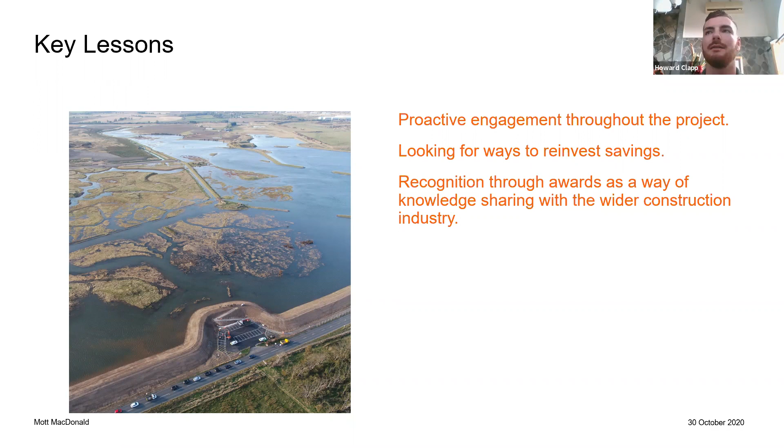So yeah, that's a quick run through of Greatham South and how it's achieved some of its sustainable goals. Thanks for listening, guys, and as Hannah said, I'll be happy to answer any questions.